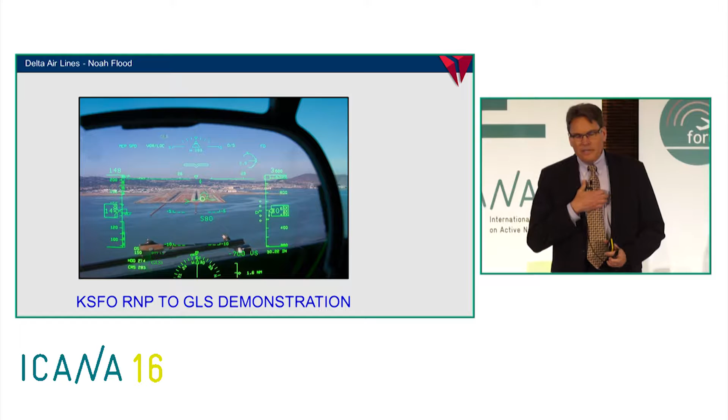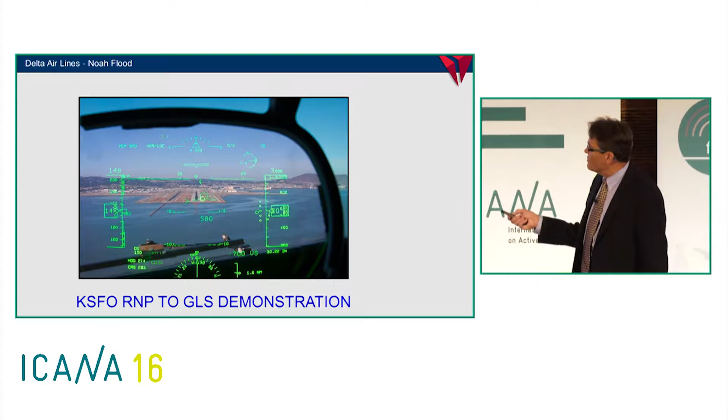The display I'm showing now is a heads-up display that we used as part of a demonstration of RNP to GLS in San Francisco, California. It gives you a view inside the cockpit. We've got our altitude here on the right, our speeds, and a feel for the airport. Runway 28 right is the primary approach we were using, but runway 28 left is only 750 feet apart, centerline to centerline.

When we talk about GBAS, there are three key components. The first is the Global Navigation Satellite System. Several countries have them in operation or soon to be operational: GLONASS, Galileo, and GPS. The second component is located at a specific airport. Frankfurt is one of the global leaders in this regard and has had a system operational for quite some time. Lastly, you have to have aircraft equipped with a GLS system.

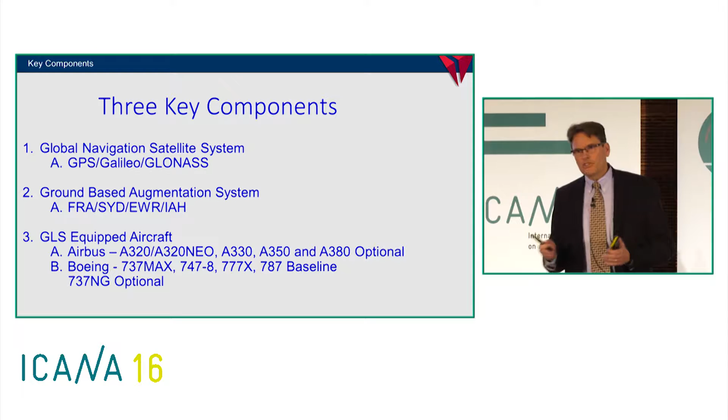GLS is the type of approach we fly using the GBAS system. On our Airbus aircraft, it's an optional system for the newer Airbuses, plus the A320 can have it turned on for operators. With the newer Boeing aircraft, it's a standard or baseline product, so there's perhaps better equipage there. On the 737 next generation aircraft, which is what I fly, Delta chose to buy the GBAS or GLS option, and I'll tell you about some of the things we've learned.

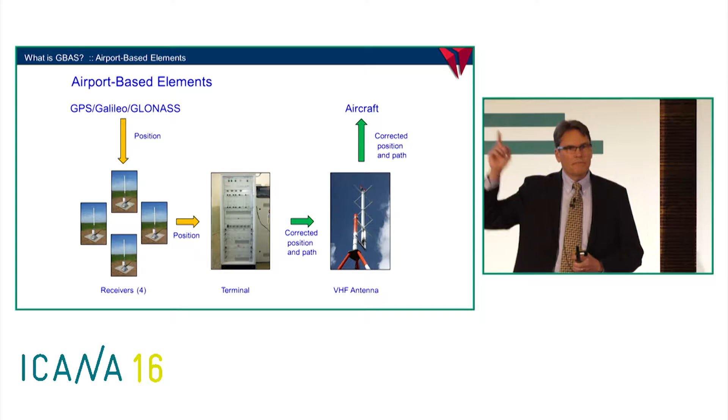The operation of the system: you take the airborne GNSS element, which is transmitting to 4 very precisely located receiver antennas at an airport. Those antennas compare - they know exactly where they are, and they compare where GPS thinks they are. They send that information to a terminal for processing, which then develops a very precise location update, transmitted by VHF data link to the airborne aircraft.

If the aircraft is properly equipped, it can receive that signal starting right here. It comes through our localizer and VOR antenna, along with information from a regular GPS antenna, and our navigation control panel, where we have to tune a channel for the specific approach we're flying with the GBAS. We also use the older-fashioned inertial reference unit inputs to this multi-mode receiver. Once that information is synthesized in the multi-mode receiver, it can be sent to our flight control computer, which operates the control surfaces of the aircraft.

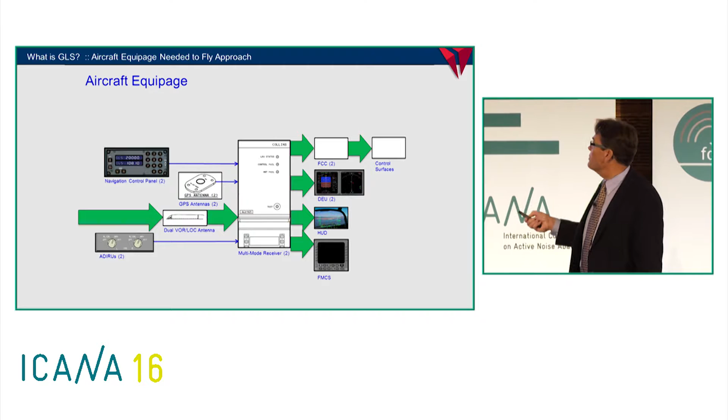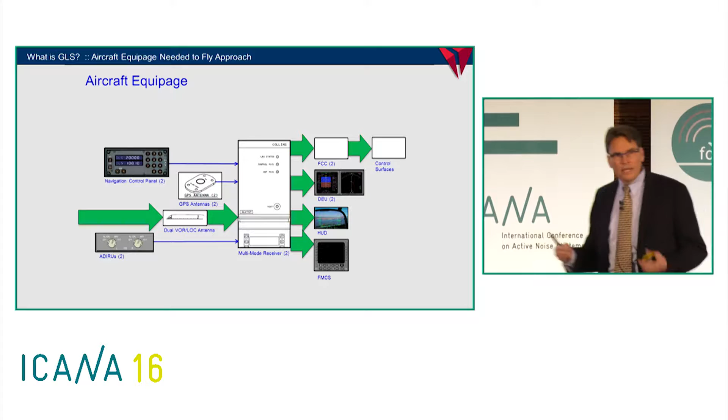If we are using the auto flight system, the autopilot, we get our display units with the information so we can interpret the data as pilots, along with a heads-up display if the aircraft is so equipped. Our flight management computer system is also taking advantage of that information.

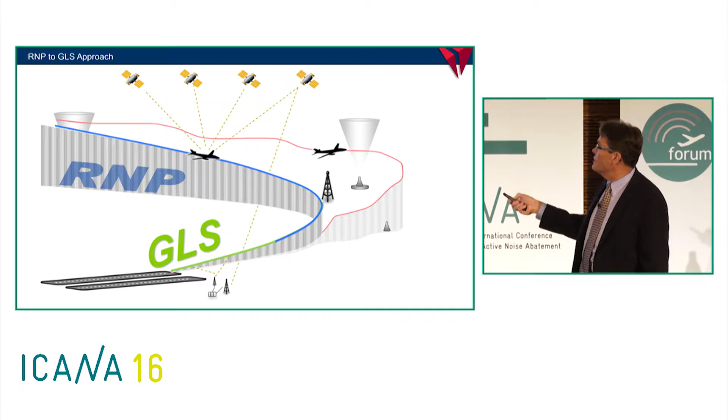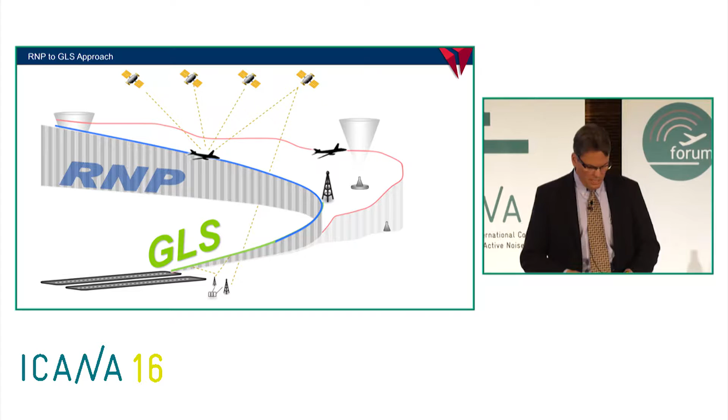What you see in red is a more traditional vectors-to-runway approach and landing. It's just conceptual, allowing you to put the concept together in your mind and see what we can do.

As far as benefits, as an airline, very much like Condor, we have to manage our finances and we look for a return on investment.

At Delta, right now, by the end of this year, we will have approximately 100 aircraft equipped with GLS capability. At the end of next year, about 150, and just under 200 the following year.

So what are the benefits of GBAS and GLS? In many ways, they are in the eye of the beholder. We can eliminate the ILS hold short lines, which is good for the airport, good for air traffic, and good for the operators because we can have less taxi time to the runway and get airborne.

As a pilot, I very much like the fact that unlike the traditional ILS system, it does not have what we call a false glide slope that will bring you down to the ground prematurely, or a mirror glide slope that may have you climb prematurely, adding power to do that climb if the auto flight system is on.

The traditional ILS has what we call a bending localizer. At times, the signal can bend and cause an uncomfortable ride for passengers, or an unsafe situation to develop if it's not caught soon enough.

Typically there are safeguards in place to reduce the chance of a bending localizer in instrument conditions, but if we use the same system in visual conditions, it can cause us problems.

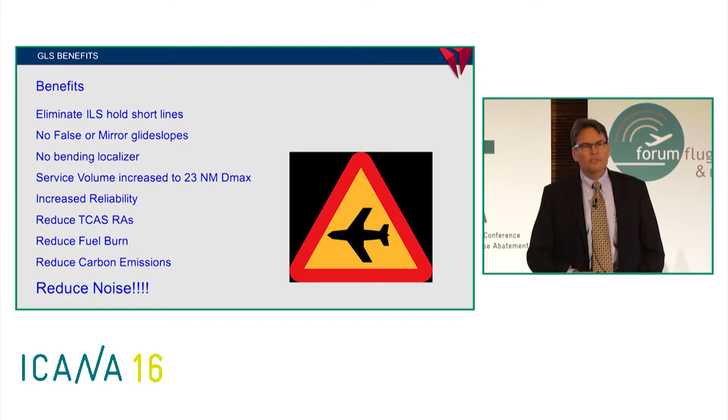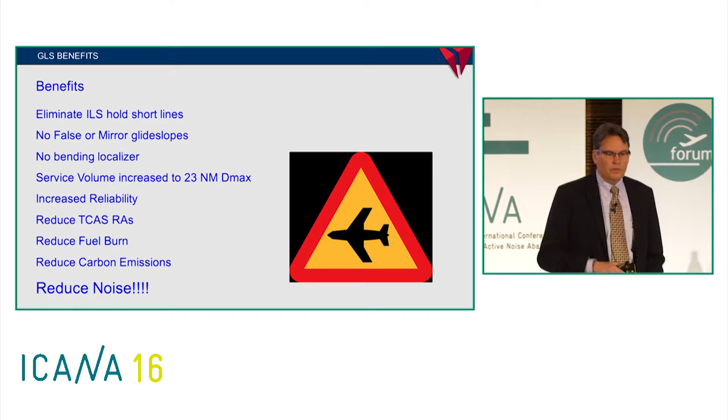The TCAS is something that affects us in the approach environment at times and reduces the chances of collisions with other aircraft, and it's more specific to the airport we're looking at. And lastly, we also want to reduce fuel burn, reduce carbon emissions, and most important here today, we want to reduce noise.

But let me talk about introducing GLS. Perhaps Europe is a bit ahead of the United States in this regard. We have two airports, Newark, New Jersey, and Houston, Texas, that have operational GBAS units. There are a couple of others, but they are not public sites; they're operated by Boeing for some of their evaluation purposes.

Initially, we anticipate GBAS will be used to overlay the same flight paths and vertical paths as the ILS approaches that exist today. The second phase, we see an increase in the glide slope angle, and I'll talk about 3.25 degrees that we used in our demonstration in San Francisco. The reason for that was Boeing was our manufacturing partner, and all Boeing aircraft are certified to 3.25 degrees for the Autoland system.

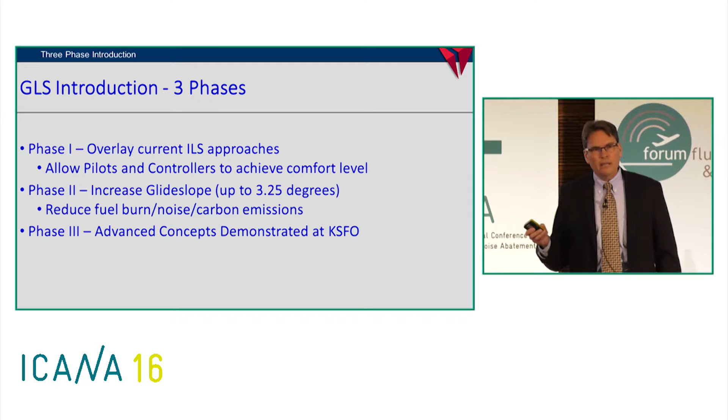Airbus may be the same, I don't know. I'm trying to find the answer to that. Our phase 3 is more some of the advanced concepts that we were trying to demonstrate with GBAS, and that's what our San Francisco demonstration was all about.

As far as San Francisco as an airport, it has some challenges. Number one, noise, as does every airport. It also has some terrain issues. There are a couple of runways where you really can't efficiently do instrument approaches because the terrain is so close, and for a couple more it limits the minimums to which you can fly your approaches. There are also airspace constraints with airports very close by in Oakland, San Jose, and NASA's Moffett Field.

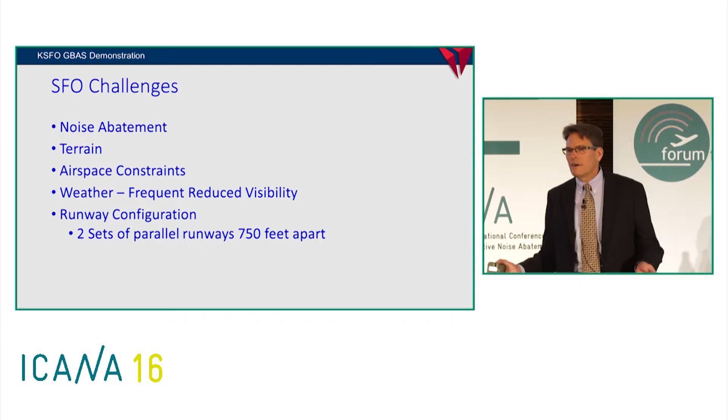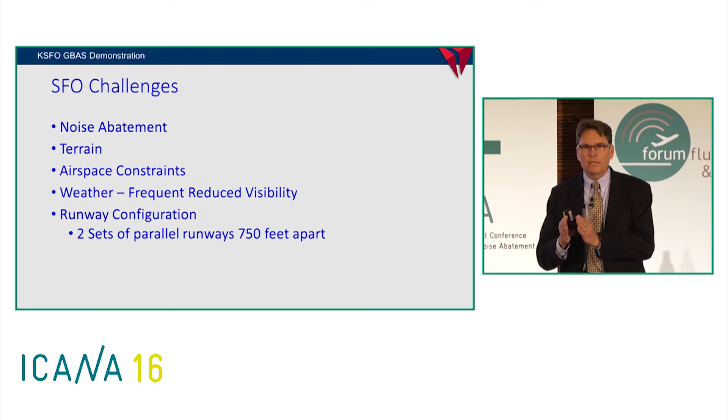And weather is frequently a factor. By San Francisco Bay, we get fog and low-level clouds on a regular basis. And then the runways themselves are a challenge because they're two parallel sets of runways intersecting each other at 90 degrees. So it was a good airport for our demonstration, plus both Delta and United Airlines had GLS-equipped airplanes that we could go fly at night when they were not in revenue service and test these advanced concepts.

So what did we do? We've got a diagram here, hopefully you can read it well, but number one is runway 10 left, and the 3.25 degree glide slope allowed us to have a precision approach where none exists today. What that means for us as pilots and the operation is that the current RNAV approach is limited to 1,200 feet. If we don't see the runway by that point, we must execute a go-around, which creates a lot more noise than continuing to land.

And with the GBAS GLS approach, we were able to get down to about a 300-foot minimum, so certainly an operational benefit. The one I'm going to talk about most a little later in the presentation is number two, which was a constant descent approach to runway 19 right, which today has no precision approach capability. And then we did a couple of approaches on number three to runway 28 right.

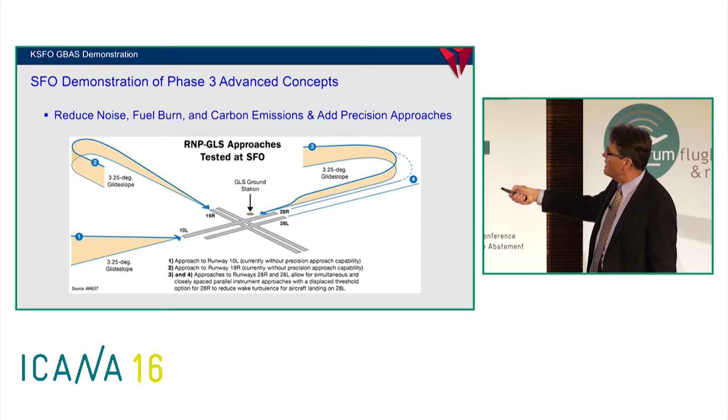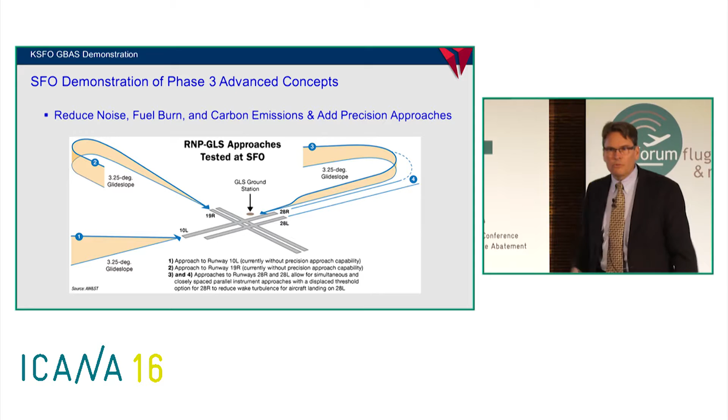I'll discuss those, but each time one of the airplanes flew the approach to runway 28 right, we had a second airplane from either Delta or United flying the approach in sequence to 28 left. On that approach to 28 left, we used the existing ILS system, which has a 3 degree glide slope and has for many years, as long as I've been flying into San Francisco. That created a vertical difference between the aircraft, which allowed for some reduced separation.

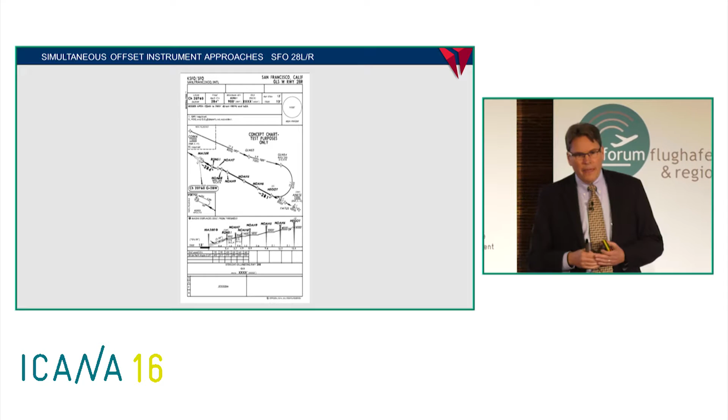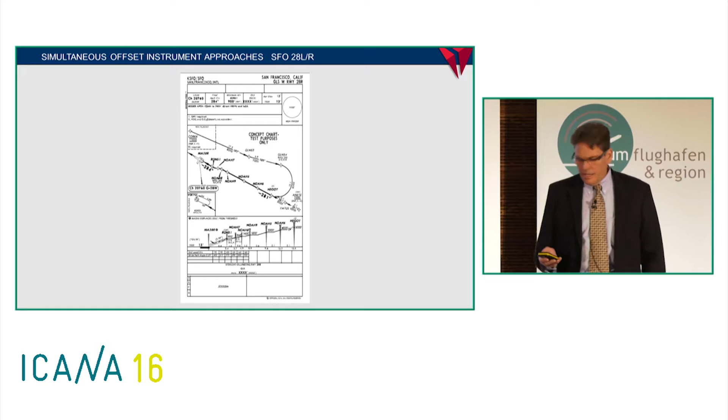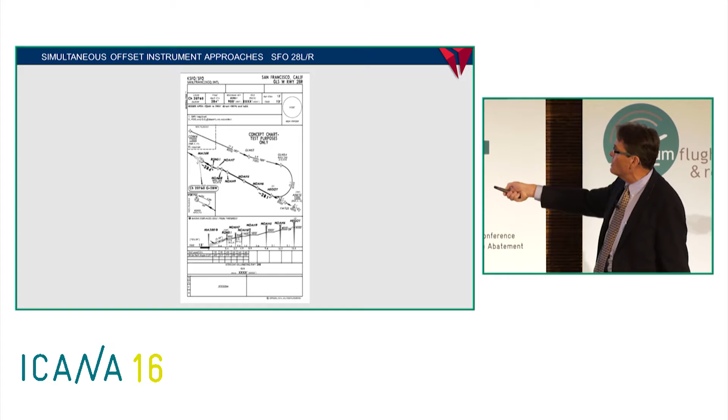From a pilot's view, this is what we work off in the cockpit. This is the approach to 28 right, what we call GLS Whiskey to runway 28 right. As you can see, it leads in with a longer portion leading to the final approach. We designed it to fly over San Francisco Bay instead of over the populated areas. And we didn't initially intercept the GLS final approach course until we got in closer, at about 2.9 miles, where we made that transition to the actual final course guidance.

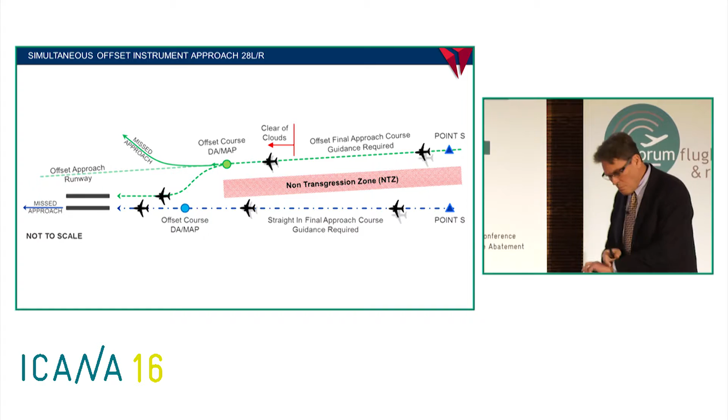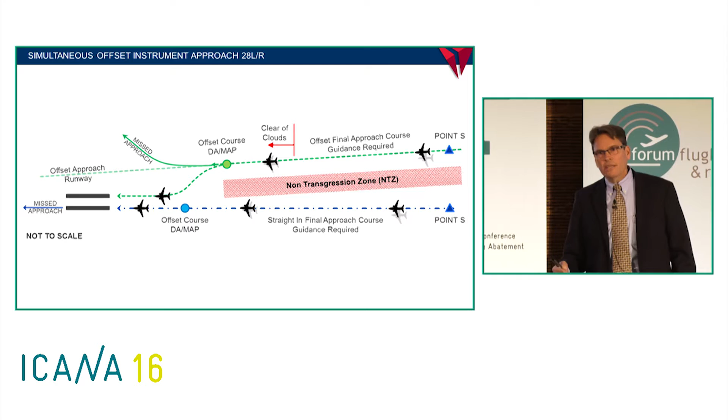Another view of this - in blue, that's the standard ILS approach to 28 left, and then the GLS Whiskey approach that we developed. Basically, we're trying to allow pilots to get into a position where we're clear of clouds. With the existing approach today, that has to be done by 1,600 feet above the ground, where the pilot has to be clear of the clouds, see the traffic to the left runway, call it in sight, and then complete the maneuver using the RNP to GLS for the final approach segment.

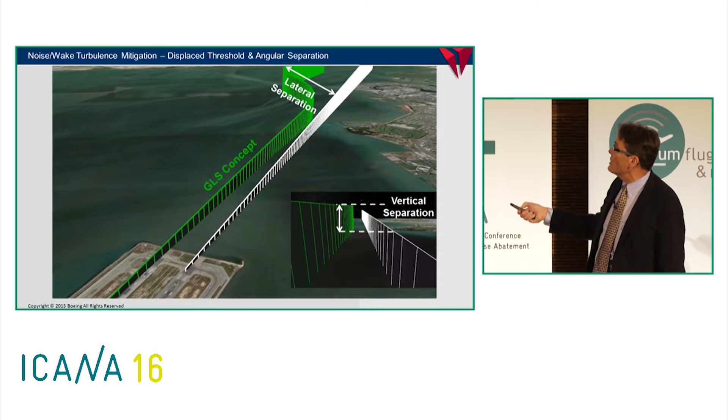This is another depiction of that same approach, showing that we kept a lateral separation of at least 3,000 feet until we had visual sighting of the other aircraft, then maneuvered left and right at relatively close range to intercept this approach guidance, which has a displaced threshold of about 2,000 feet.

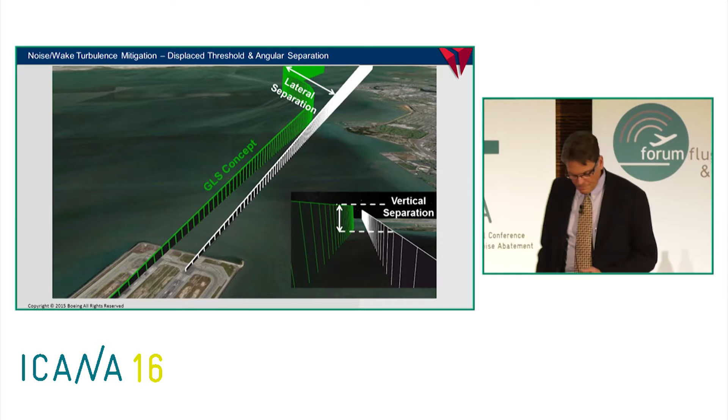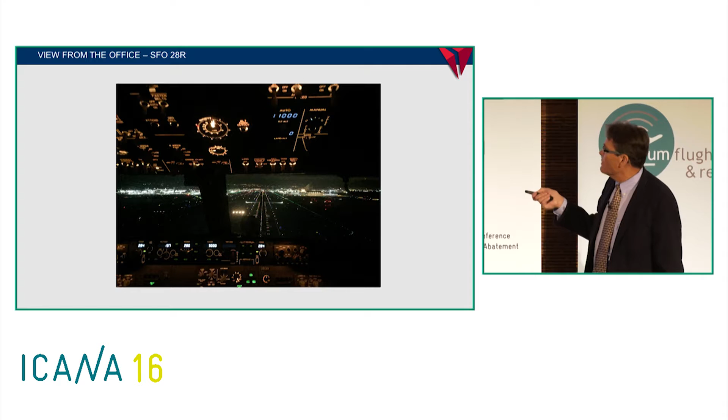I couldn't resist showing you my office the night we did the demonstration. These lights would be two red and two white if we were on the glide path for the traditional approach at the regular threshold, versus aiming for a threshold where the airport authority kindly put construction lights, giving us a visual cue to back up what was programmed in our navigation database and ensure we were flying a good path.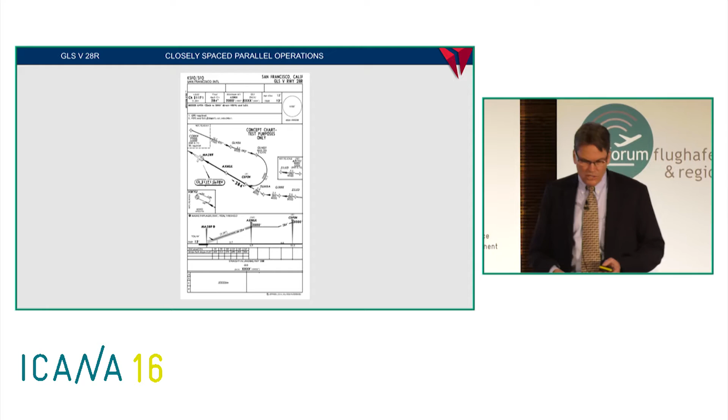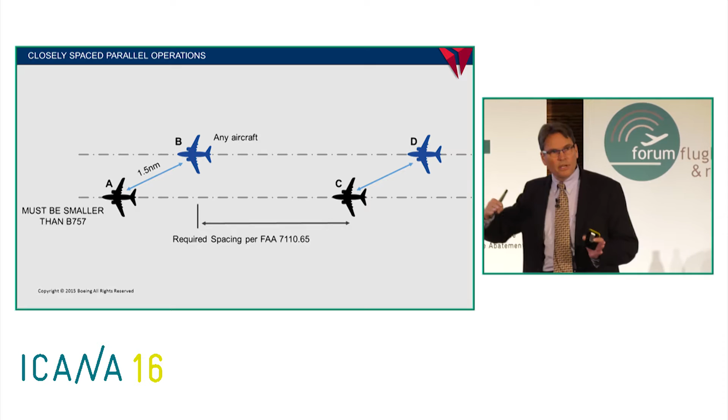This is the GLS Victor for runway 28 right, and maybe this is an easier slide to look at. Our goal here was twofold. The first being to reduce the vertical or horizontal separation between the two pairs of aircraft going to the respective runways. Today, it has to be 1.5 nautical miles between the two aircraft as they come in.

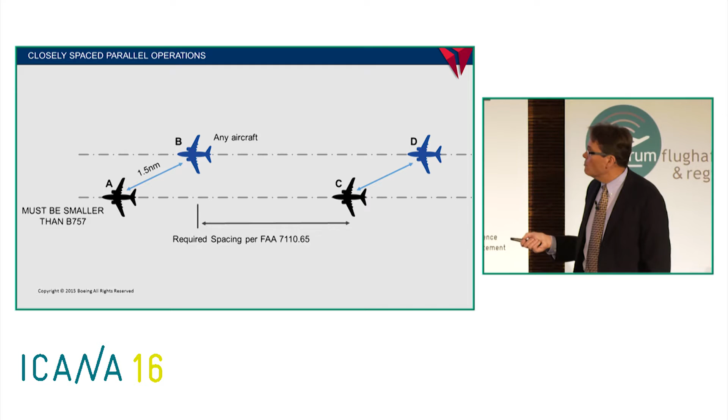The other goal was, today, the aircraft to the left runway must always be 757 or smaller. So that's a sorting challenge for air traffic controllers to ensure they have the right aircraft going to runways capable of handling the approach, while still respecting wake turbulence separation criteria.

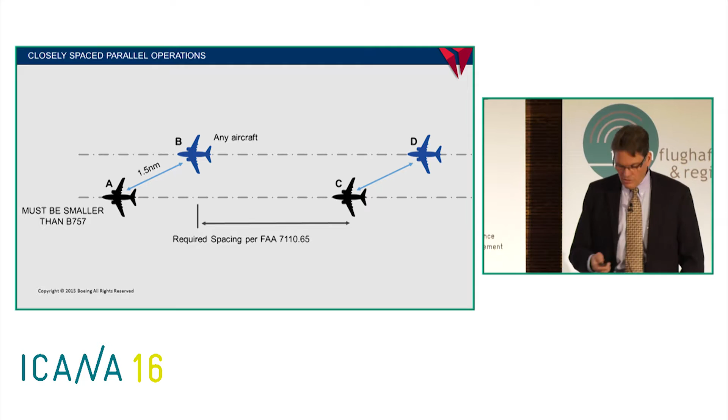So this is really what noise people want to talk about. This is our report that came out on the 18th of November. I have not briefed my boss on it yet, so I'm telling you what I think about these things at this point, and we're more than willing to share the final report with you if you're interested—please let me know.

Realize this was not just Delta Airlines. San Francisco International Airport was kind enough to host our project. The FAA controllers in the tower and the TRACON worked with us in developing this, and some folks from the Tech Center came out and flew with us during the approaches. United and Delta each provided an aircraft and crew and were involved in development of the approaches. Boeing was kind of the mother—they helped organize this all and kept us pointed in the right direction. And Jeppesen provided our navigation databases and the approach charts we needed as pilots to fly them.

All right, let's talk noise. Runway 19 right was, for me, the most interesting approach to fly, and I think we were pretty successful. The preparation leading up to the flying involved optimizing the ground path, and to do that we looked at 260 aircraft flight paths, reducing those to a long vector route in blue and a short vector route in red. Overlaying here in green is what we designed with the GLS, the RNP to GLS approach.

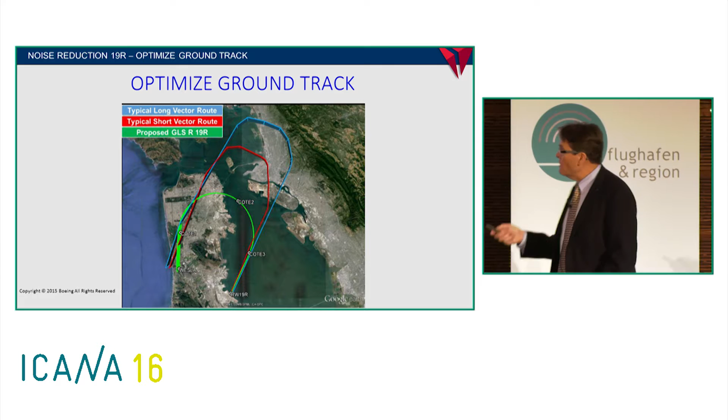Interestingly enough—I'll show you a slide later about noise reduction—the short vector route actually was not as good from a noise reduction perspective as the longer route, and it will make more sense with a future slide.

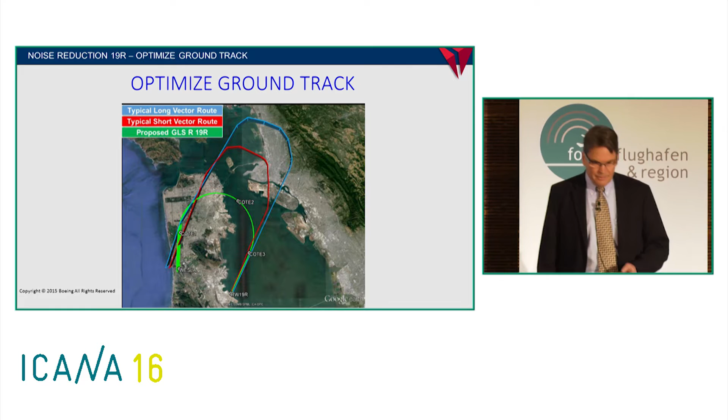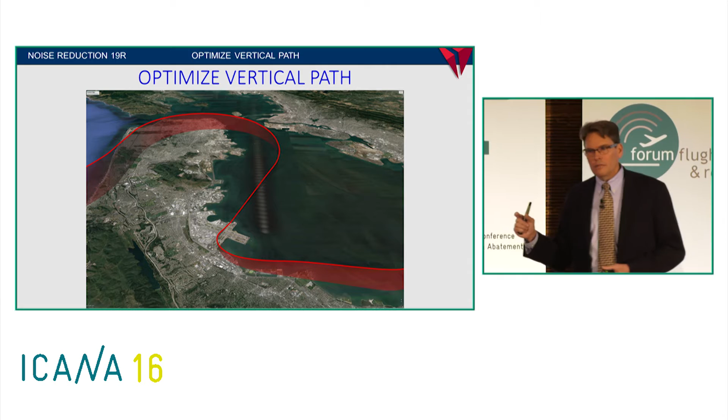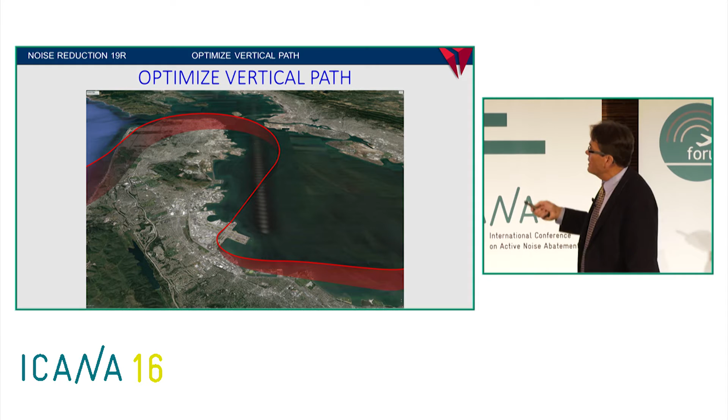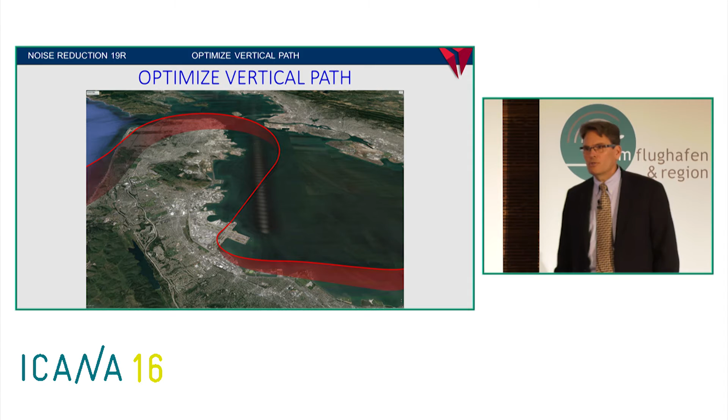Another nice benefit of this approach is Oakland Airport is right here, on runway 12. Today, you cannot simultaneously land on runway 12 at Oakland and the 19s at San Francisco. If this approach gets implemented, both airports will be able to operate, and we've procedurally separated the approaches with vertical separation.

So how did we fly it? We really worked hard on the design. We had a good lateral path and a good vertical profile, and we went out to fly. I did something a little bit different than what we did in the simulators at Boeing in anticipation, and we got a little bit better result.

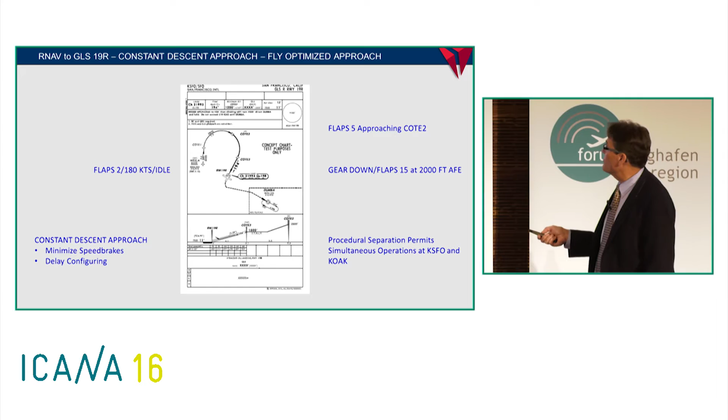We were obviously trying to minimize the use of speed brakes and delay configuring the aircraft to keep the throttles in idle as long as possible. It's hard to see on this approach plate, but we started at Westla, almost abeam the runway at 6,000 feet above the runway. We used flaps 2 and 180 knots, with the throttles in idle.

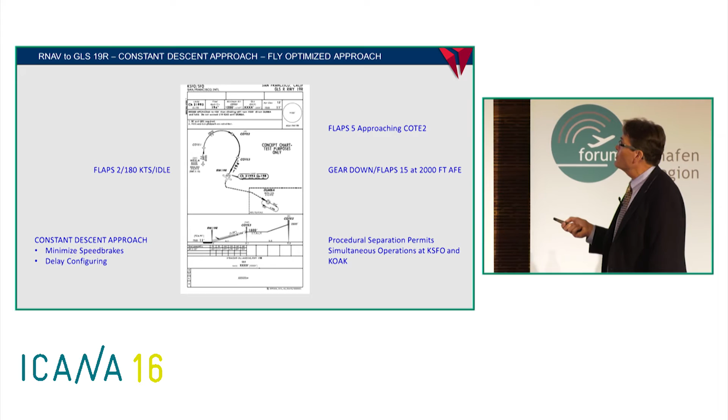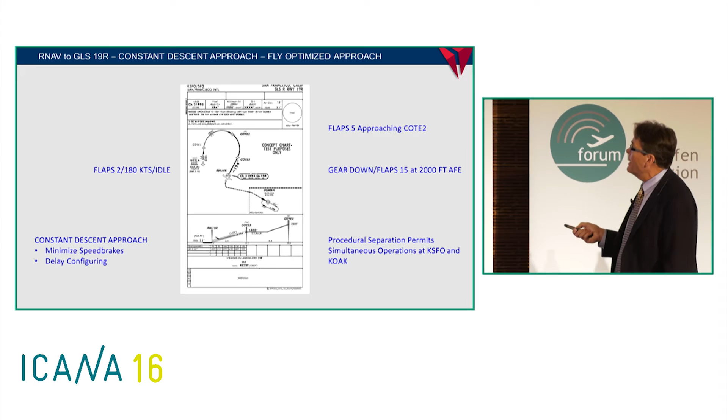The throttles stayed in idle during the descent until we approached COTE2. While the throttle stayed in idle, we added flaps 5 to start slowing down, and we never leveled off. We kept the descent coming completely, contrary to how it's depicted on the approach. We kept a constant descent, and when we reached 2,000 feet above field elevation, we dropped the gear, went to flaps 15, and continued slowing and configuring the airplane.

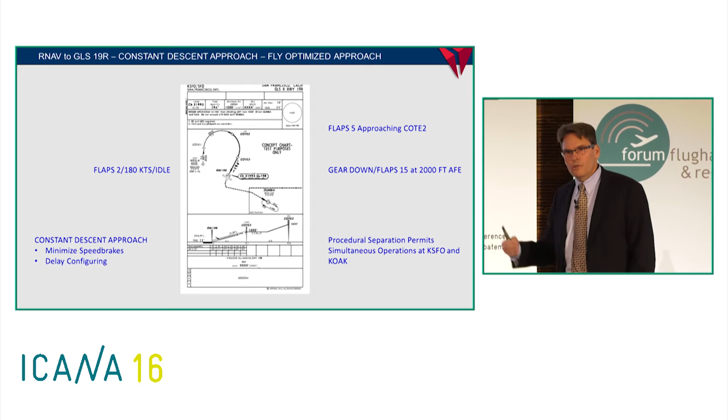We were very pleased with the results. This is based on the modeling we did, as opposed to the actual flight results. But the big message here is that with the ground track and vertical path selection, on the long vector route we affected 296,000 plus people with decibel levels above 55.

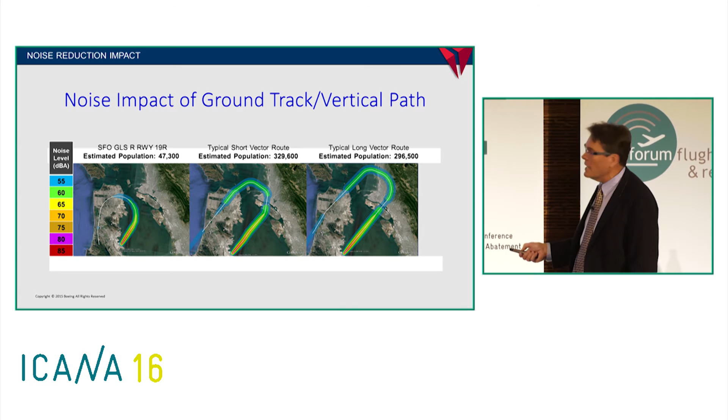329,000 or more were affected with the shorter vector. Even though it's shorter, it went over a more densely populated area of Oakland. We only affected 47,300 people flying the GLS R to runway 19 right. You can see how it was quiet, and that's about where we went to flaps 5, and then later where we added more flaps, and eventually the landing gear and the power coming up for landing.

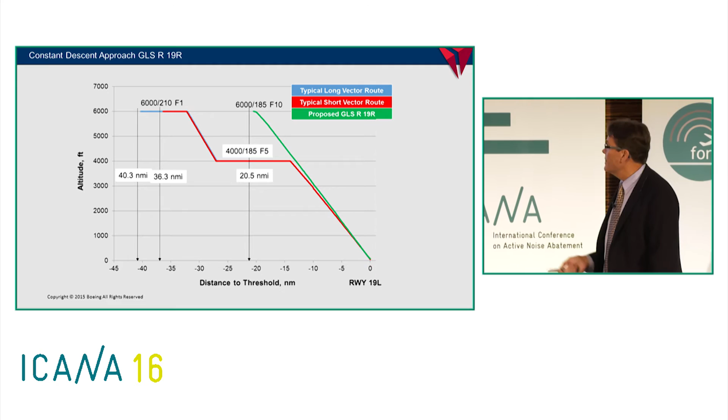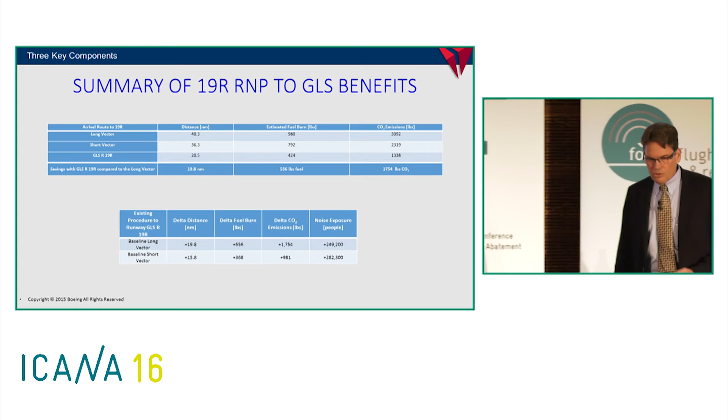In summary, here you can see the long vector, short vector, and GLS. The big message here is we reduced the mileage by 19.8 nautical miles from the long route. We saved 556 pounds of fuel, 1,754 pounds of carbon emissions, and you can see below we reduced from about 250,000 to 280,000 people being affected above 55 decibels, down to the 47,300 number I showed you earlier. So we were quite pleased with the results.

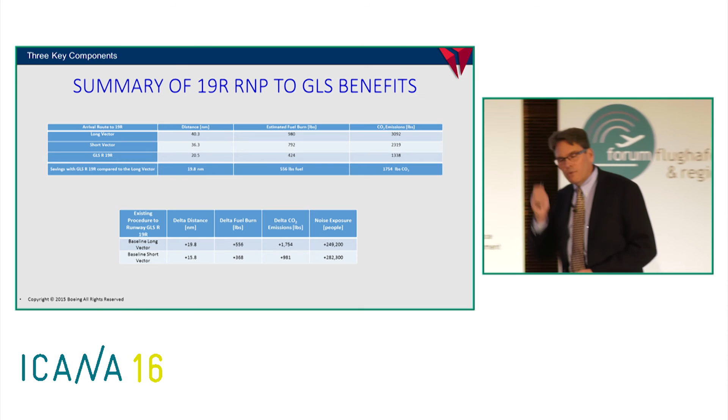And actually, the GLS here we did better than the modeling forecast and the simulators. They had us flying at 424 pounds using fuel during the full 20.5 mile track, and we actually flew 327 pounds, so almost 100 pounds better.

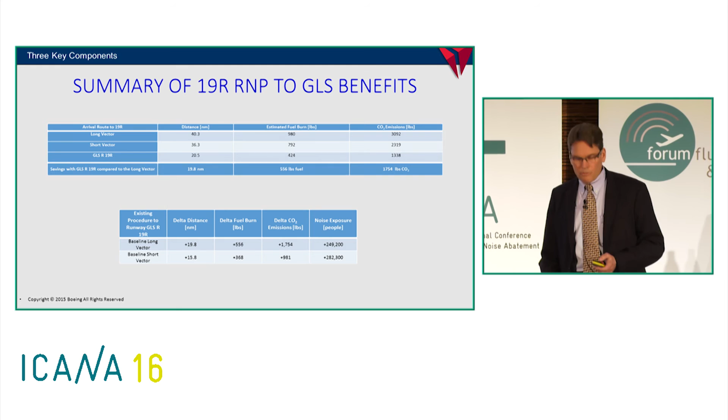Just summarizing here, where do we go from here? We were very happy as an airline with the results of this demonstration, and not just Delta, but the whole team. We felt we took some things from the theoretical to the practical level, and we're hoping we'll be able to implement some of these things at San Francisco and other airports.

The terminology in German was a little bit different, but in English it's which comes first, the chicken or the egg. There are airports looking at this system and installing it, and we very much wish to work with our airport partners to see the installation of GBAS units so we can start taking advantage of some of these benefits.

The manufacturers of the aircraft and the airlines have to step up and make the investment in equipping the aircraft. Air traffic management needs to build constant descent angle approaches and initiate approaches at higher altitudes. In Europe, I think you're better at keeping flight paths and altitudes higher as long as possible, and that's an area we need to work on improving in the United States. We need the cooperation and support of the air traffic controllers and the pilots.

With regard to some of these challenges, it's interesting—today at Delta Airlines we have our OPSPEC authorization to fly Cat 1 GLS approaches with our 737s and our A321s, but with only 2 airports in the U.S. that operate it. I am reluctant to do the training and have the pilots prepare to fly, when it may be several years before they actually get to fly a GLS approach.